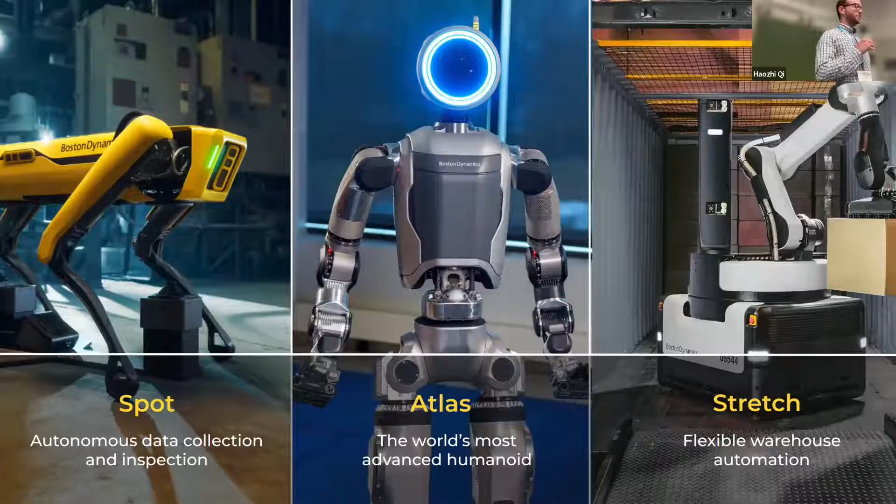It's been a very exciting time to be working on robots and growing quickly. Just to give a little overview of some of the robots we have at Boston Dynamics, our three primary robots are Spot, our quadruped robot, which many of you will be familiar with - it's an autonomous data collection and inspection robot primarily. We have Stretch, our wheeled mobile robot, primarily used for warehouse automation. And then, of course, Atlas.

This is our new electric Atlas robot, our humanoid platform that we've been using most recently for a lot of cool manipulation stuff. As I said, this is our electric robot. Most of what I'm going to talk about in this talk is going to be dealing with our previous version of Atlas, the hydraulic Atlas robot, but many of the manipulation skills will transfer over to electric Atlas.

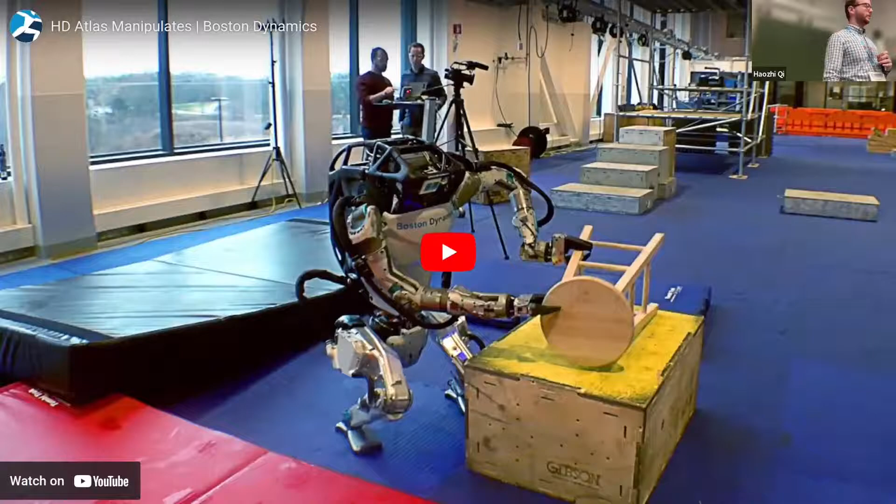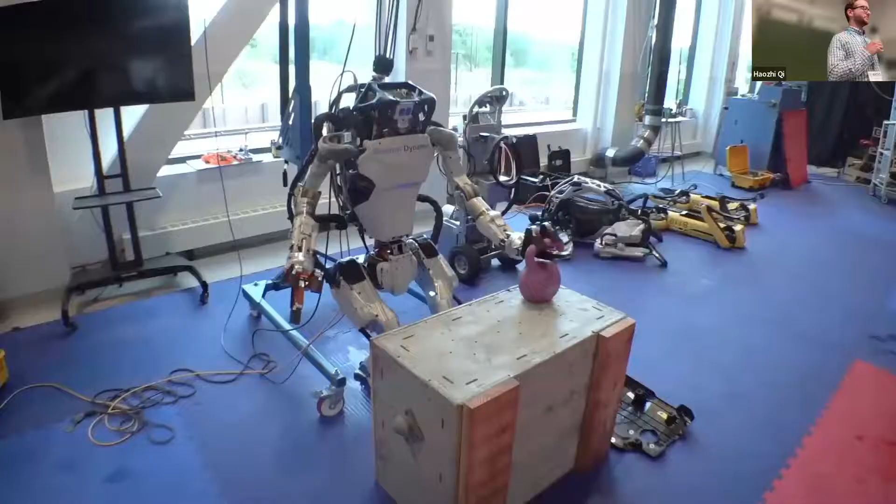I want to focus on some of the different technologies that went into this video that was recently released, called HD Atlas Manipulates. This is a montage of some of the different manipulation skills we've developed for Atlas. You can see pick and place of some of these large objects, lifting kettlebells, which we'll see a lot of, doing things like object reorientation, and more fun pick and place stuff.

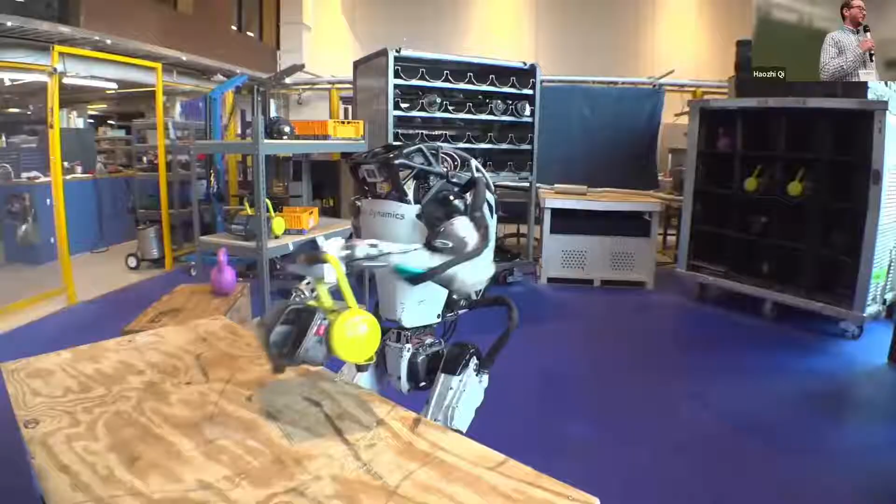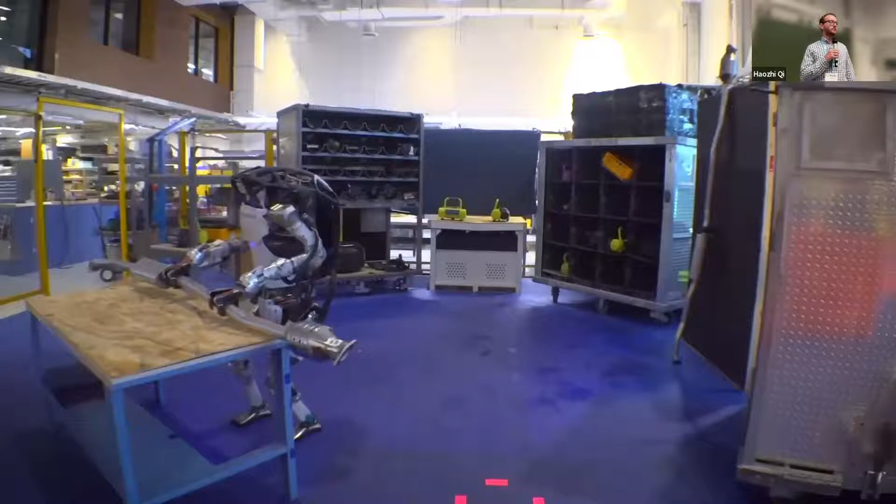This is a fun one - this is regrasping an object, which is particularly tricky. Obviously, dancing is a big part of what we do. We're particularly interested in lifting heavy and inertially relevant objects with Atlas - that's one of the key capabilities we're developing. So here we're lifting a big exhaust pipe. Here we have a heavy tool bag, and we want to retain our ability to do dynamic locomotion.

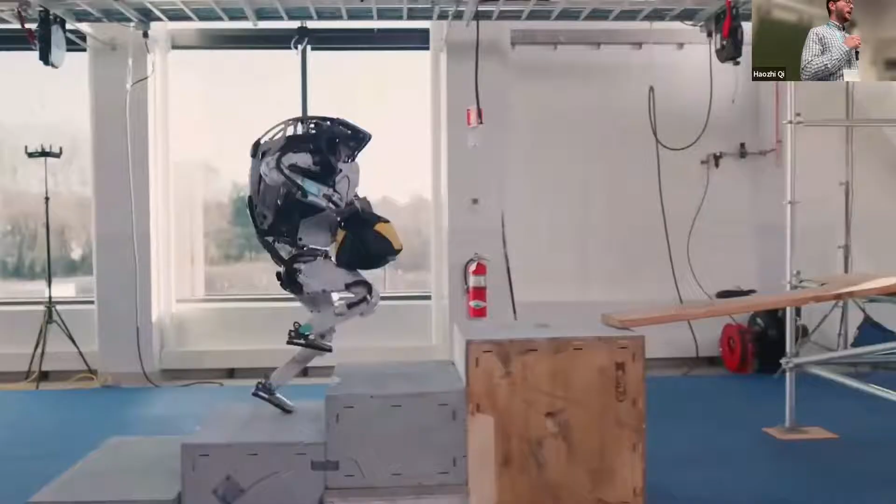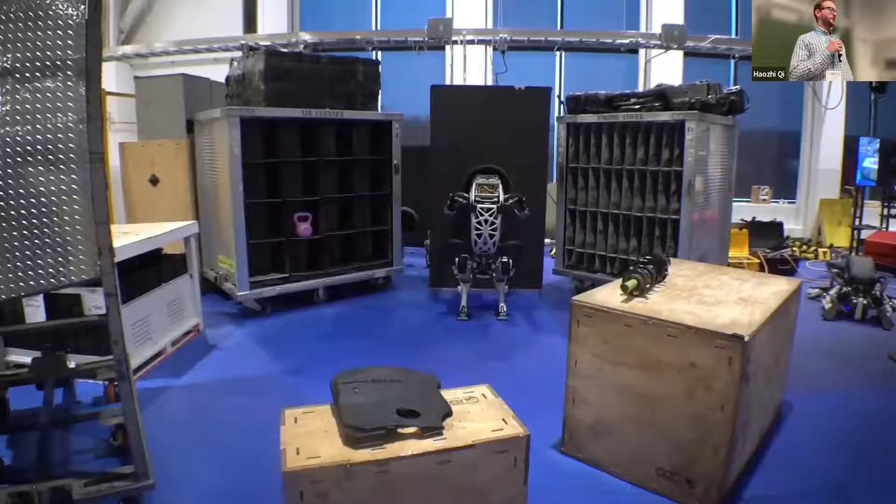Here's a bit more pick and place of some heavy car parts. This is a strut for an automotive strut, which is around 7 or 8 kilograms. This is a wheel, around 10 kilograms. The robot actually needs to reason about how heavy these objects are in order to balance as it's moving around, which makes this particularly tricky. Here's another kettlebell - Atlas is always getting a good workout.

At the same time, we also want to be able to manipulate some delicate parts. So here, this is a plastic engine cover.

I want to go into some of the technical details of what went into the behaviors in that video that are easy to not notice as they go by. In particular, we've been developing new technologies that support things like regrasping, like we saw earlier with the strut, but here it is with the compressor.

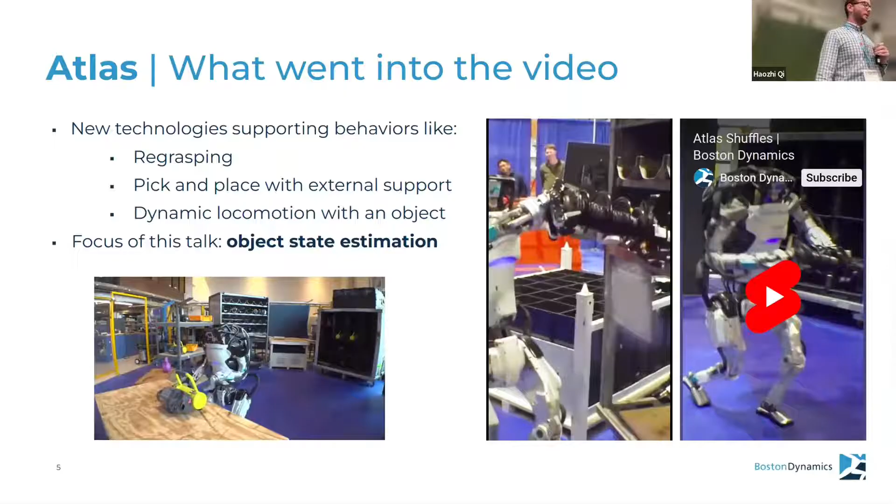Picking and placing objects with external support - this is particularly tricky, reasoning about how much of the object's weight is being supported by external fixtures rather than by the robot itself. The robot needs to know what's going on in terms of the mass properties of objects. And then, of course, doing dynamic locomotion with a heavy object requires the robot to reason about how it balances in response to this inertial load.

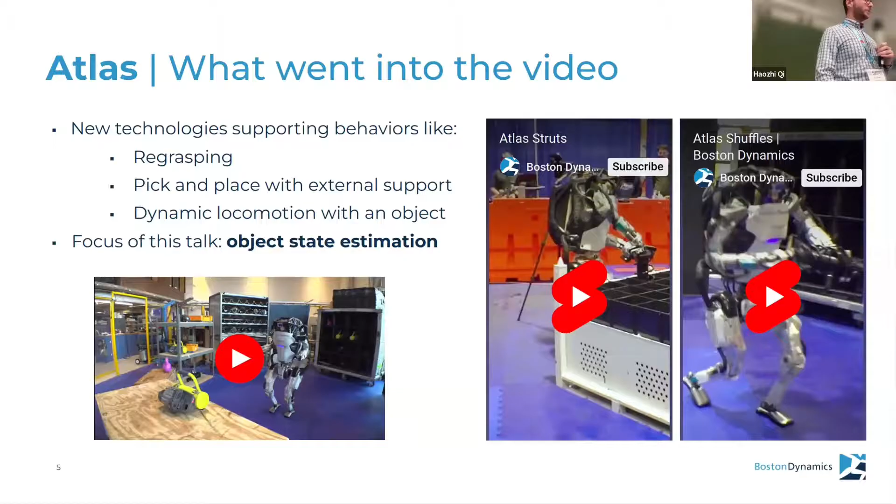Now the focus of this talk is going to be on object state estimation. But first, I want to give an overview of how Atlas works from a control standpoint. The workhorse technology that gives Atlas its athleticism is called Model Predictive Control, or MPC.

I expect many of you will be familiar with this, but for those who haven't seen MPC before, the basic idea is that Atlas is continually replanning a near future trajectory in a moving horizon. Starting from its current state, it uses online optimization of some objective function with respect to constraints relating to Atlas's dynamics and kinematics, and we track the most recent solution trajectory.

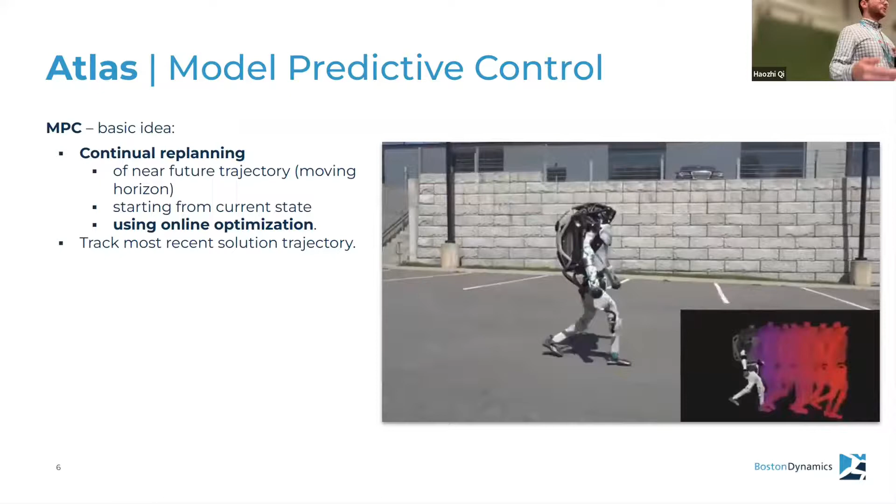So this is what that looks like. You can see Atlas is predicting a future horizon of the different kinematic states it needs to go through. But of course, this requires a model of the dynamics, and this is the blessing and curse of model predictive control. The fidelity of your model matters a lot for the performance of the overall system. Everything that goes into this involves nonlinear dynamics, costs and constraints, so you iteratively linearize and solve, but you need a good model of the system.

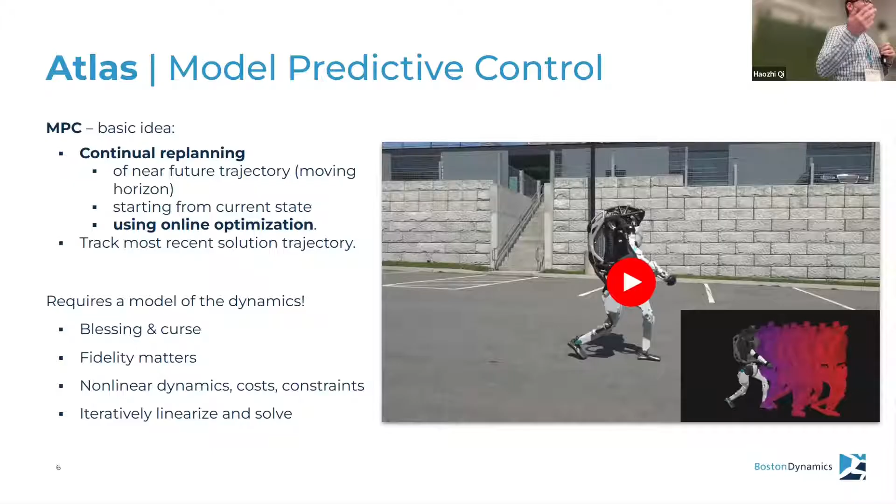Now, to make this work for manipulation, we wanted to manipulate objects that are heavy enough that their momentum actually matters while retaining dynamic locomotion ability. We don't want to just compensate for this inertial load on the object, but we actually want to be able to exploit it as we're moving around. And we want to do this in a generative way. We don't want to have canned trajectories for specific objects because we want some hope of this actually scaling.

And of course, we'd like to provide only a high-level task specification rather than having to give the robot all the details. So here, an object reference trajectory will guide what the robot should do, and the robot can figure out how to affect that change on the object based on the kinematics and dynamics of that whole system.

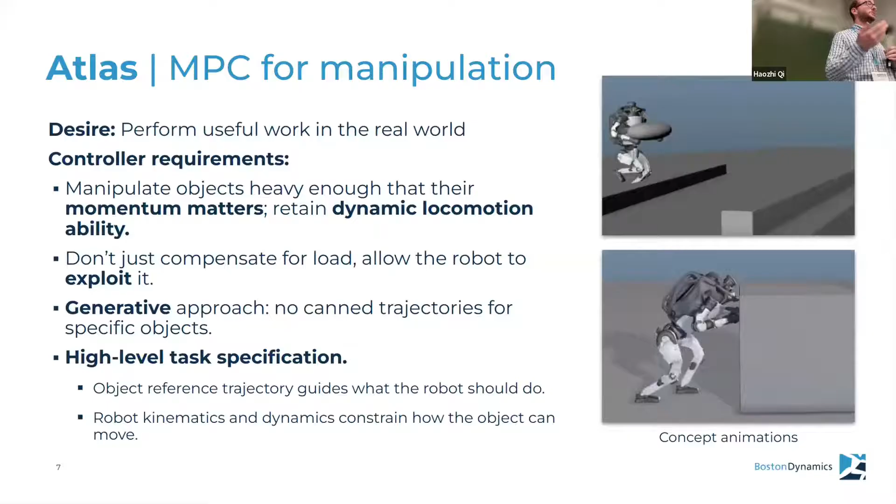So MPC with an object model has powered a lot of our developments over the last 2 years, and it's enabled us to do lots of cool stuff like dynamic locomotion, which you can see here, where we are picking up this exhaust pipe. I think this is also around 7 or 10 kilograms in that range. And we can do parkour with it, which is super cool. The same sort of pick and place that we saw earlier.

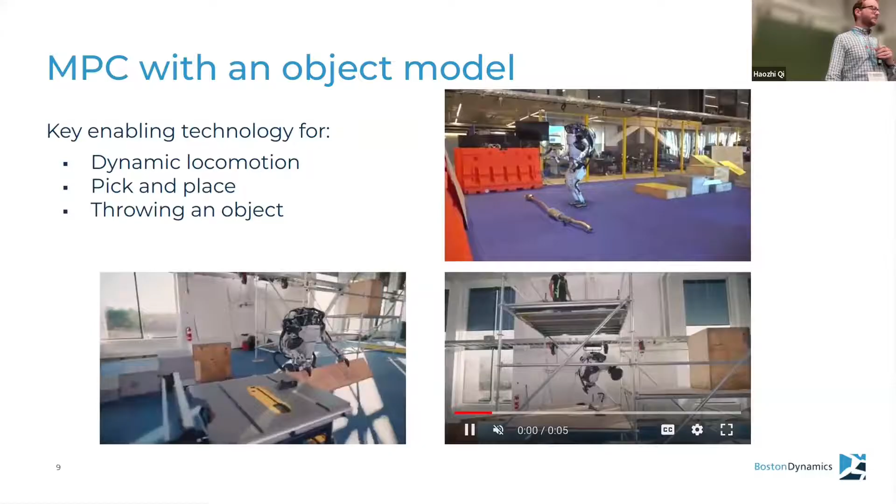And then even pretty cool behaviors, like throwing an object. Here we're throwing a heavy tool bag to a desired target location.

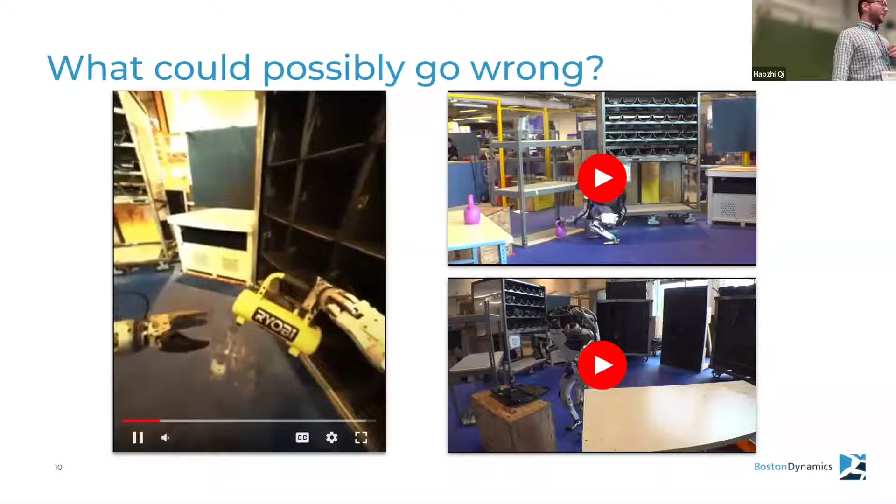But of course, in practice, when we run this around the lab, things go wrong all the time. So we see things like this, where we miss a grasp, we drop an object. We go to place a kettlebell, and we just totally miss and drop it on ourselves. And this is my personal favorite: every now and then, we'll pick up an object, go for a grasp, and the robot just totally falls over.

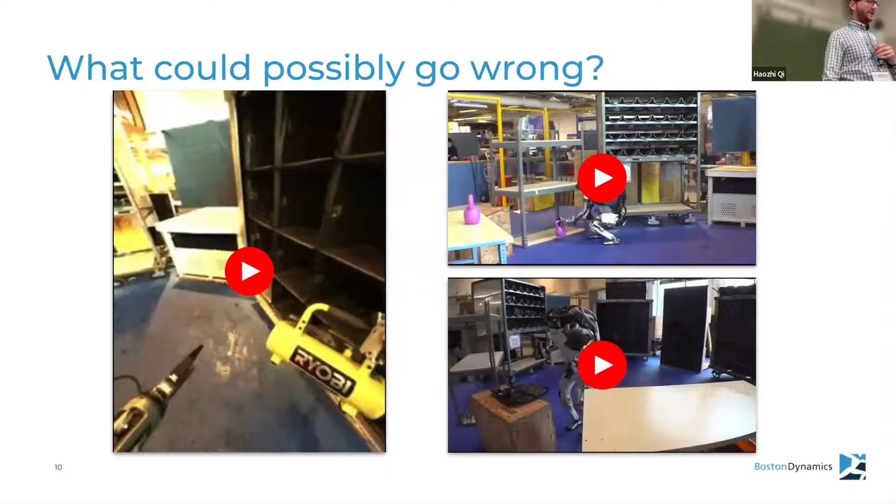Okay, so what went wrong? The key thing about this MPC with an object model idea is that we require some idea of where this object is at all points in time. We need to know the object's state in order to have some idea of its dynamics and kinematics. This is a huge drawback of that approach, because in every one of those examples I just showed, the robot thought the object was somewhere that it was not, and that caused it to miss grasps. Occasionally, because it's thinking about the momentum of the object it's about to grasp, it will miss and then just fall over. We don't want this.

What else could possibly go wrong? Here I'm showing 2 videos, simulation videos of Atlas, and I hope it will become clear why I'm using simulation in a moment. On the left, I'm showing a video where the robot's about to pick up this kettlebell. I'll give you a little primer on what's about to happen: it's been told that the mass of this kettlebell is much less than the true mass, so it's not expecting much mass of the object. Let's see if the video loads when it goes to pick it up.

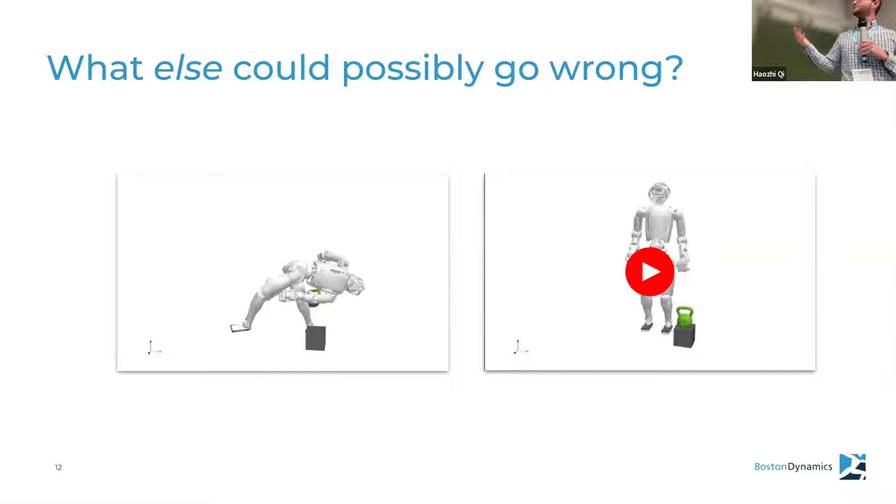Immediately it gets thrown off balance and falls over. And then here, we do the opposite. We tell the robot to expect a really heavy object, and then it doesn't have time to react to the fact that the object is actually much lighter than it expected.

This is the second drawback of this approach: if you want to know your object's dynamics, you need to know its inertial properties, how heavy that object is. For MPC to work well in these settings, we need to know the mass properties of the objects we're dealing with. In many of the examples I just showed, we did know the mass properties of the objects, so that helps a lot.

But I want to talk about how we can relax some of these assumptions, or just do better in general, and have a more robust manipulation system on Atlas.

Okay, so I want to first deal with this issue of object pose estimation. These are the ingredients that we have on Atlas. We have two primary sources of information. The first is forward kinematics.

The essential idea here is that if we assume the object is in a fixed pose relative to the end effector, then we can use the robot's forward kinematics to say the object is stapled to my end effector — however my end effector moves, that's how the object moves. This is a high rate signal, which is great. You don't need to be looking at the object to know where it is, which is also great because oftentimes we're carrying objects that are only in partial view, occluded, or out of frame entirely. But the downside is that we have no way of knowing when or how an object has moved relative to the end effector.

This is a problem for two reasons. One is that when we're not trying to affect motion of the object in hand, it often happens accidentally. The second is we have no way of actually commanding the robot to move an object in hand if we wanted to, which is particularly challenging.

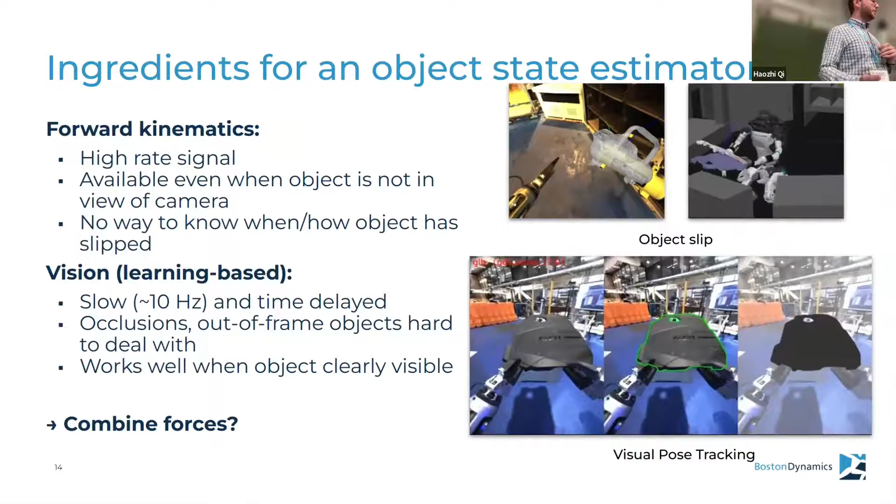The essential idea here is that we'd like to combine these different sensing modalities — this learning-based model of object poses, and this more traditional model of forward kinematics — to do better. This is our recipe here.

The idea is that we're going to use forward kinematics, but allow the object's pose relative to the end effector to change over time. So we'll seed the object pose estimator with our current tracked pose estimate, and then propagate its vision updates to the end effector frame. Then MPC will assume that the object is glued to the end effector at the latest end-effector-relative pose and use that to plan forward in time. We're just continuously updating that state.

We also require that this happens in real time. So how do we actually do that? At the same time, we need to deal with the fact that these sources of data are coming in asynchronously. The way that we handle that is with something called a factor graph. These are a particularly natural modeling tool for these types of problems. There are many convenient open source tools for working with problems parameterized by factor graphs, like GTSAM and G2O.

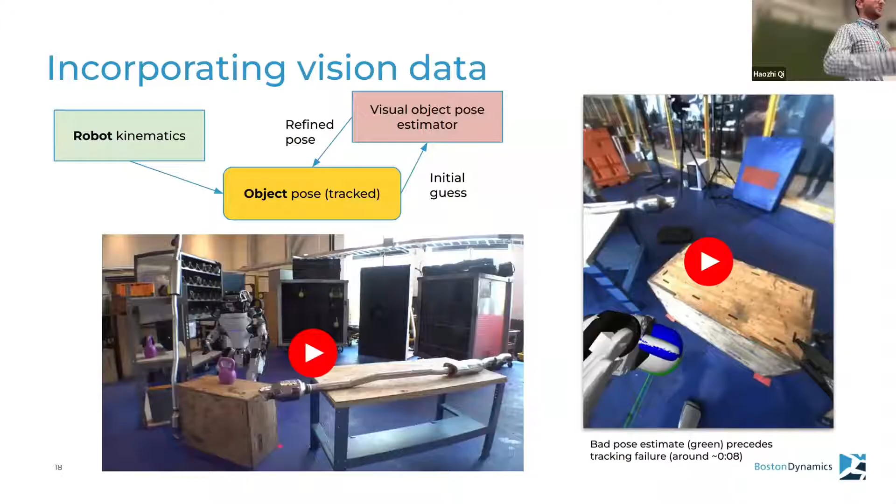So what went wrong? You can see what happens on the right here. In green, we get a bad pose estimate. This causes the object to go out of hand in its track. Since we're operating in a regime where we send the tracked pose back to the object pose estimator as an initial guess, the estimator can't refine that pose anymore, and the whole system goes unstable when we drop the object. So robustness is really important here, otherwise we're just going to be dropping objects all the time.

Fortunately, when the system works, it works quite well. Here you can see the kinematic track in red compared to the fused track in blue, and the blue tracked object is much better than from kinematics alone. But we need to know, in order for this to work well, when the neural network got the right answer without actually knowing the answer, because of course if we just knew where the object was, we'd be done.

A natural thing to try here, and a thing that we did try, is to essentially just ask the neural network to score itself. But of course this is environment dependent, lighting dependent, background dependent, and often this works about as well as just the pose estimation in the first place.

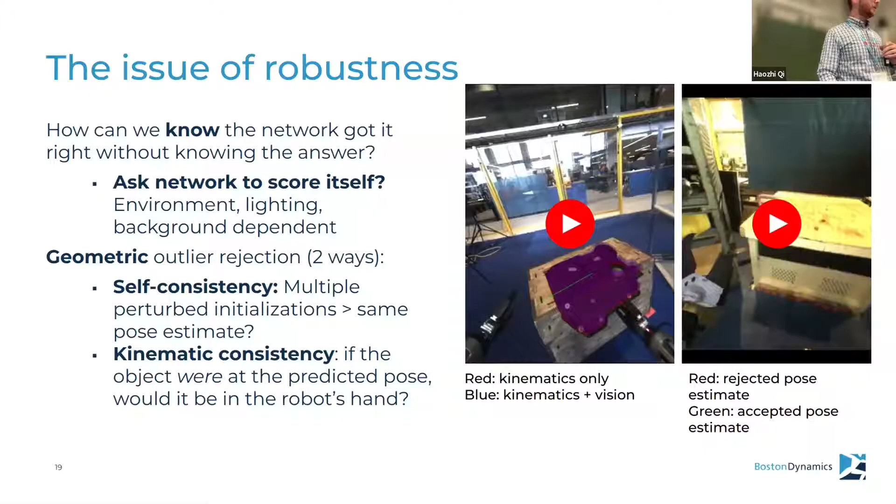So what we use instead is this geometric self-consistency measure, which is common in pose estimation literature. Essentially, we seed the neural network with multiple initial poses, and it gives us back multiple answers. We evaluate the consistency of those poses on the way out, and if they're consistent, we say it's more likely to be an inlier.

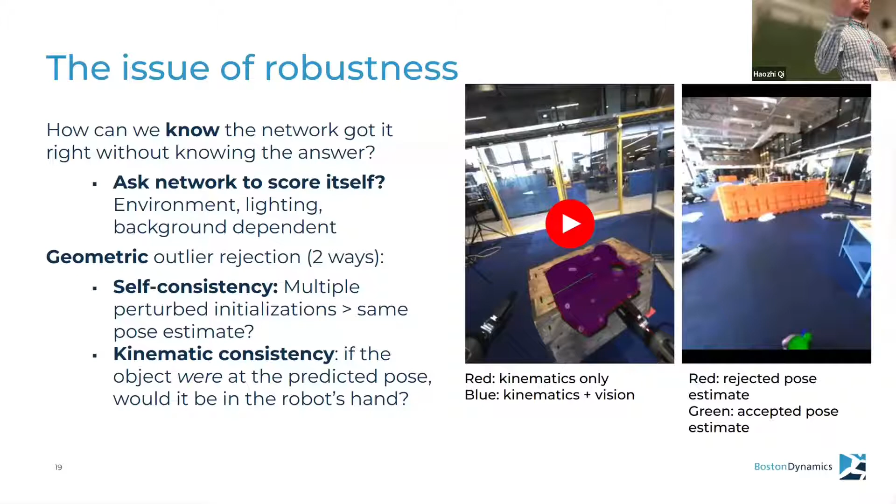Still, these measurements could be biased. So we also check whether or not the predicted pose could correspond to the object being in hand, or if it's out of hand, then we reject that measurement.

Okay, I want to talk briefly about how we add in mass property estimation. So here, we just kind of mirror what MPC does, where we augment our model with this: net wrench is approximately equal to the momentum rate of change.

Here, rather than in MPC, where we're trying to compute the desired wrenches to affect a momentum rate of change, we're measuring wrenches and trying to determine from the momentum rate of change what the mass properties of the object are. So we add these new states, the mass and center of mass, and we get object velocities and accelerations estimated from forward kinematics.

And then we measure wrenches from the wrist force torque sensors and joint torques. And then we say that the object frame mass properties should be approximately constant over time.

The nice thing about the factor graph representation is that it allows us to develop an estimator that is very modular. We can essentially staple on this mass property estimation module to the kinematic state module we had before, and use exactly the same inference approach.

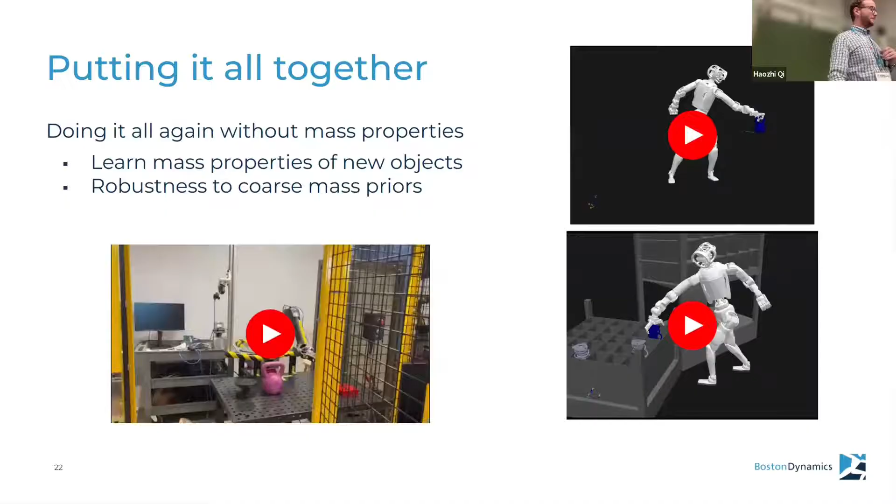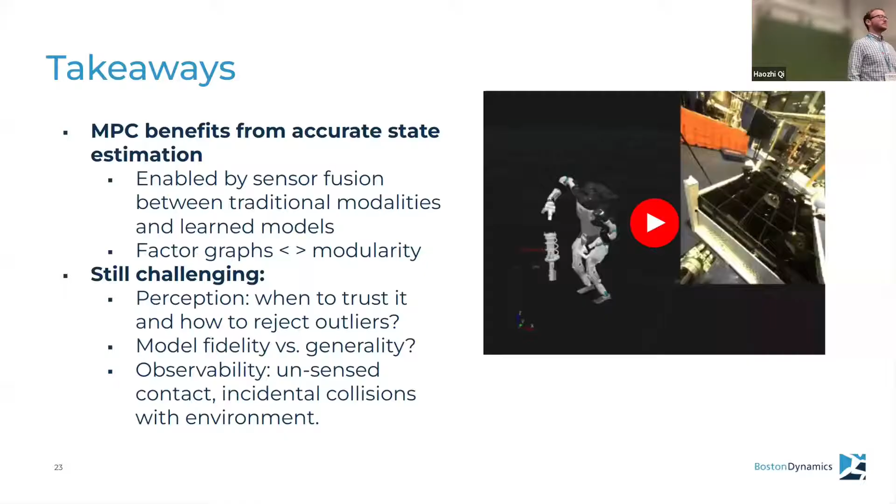Yeah, those are a lot of good questions. For the first question, yes, we assume that we have a model of the object. The visual pose estimator uses a render and compare method - we render the CAD model and use a neural network to predict how we should move the CAD model to align with the image. We also used that to derive inertial properties of objects, assuming constant density, things like that.

The second question was about using position control. We've been thinking a lot about position control recently, and we have some results about doing that. I don't have anything in my slides, but yes, that is a thing that we do also, and it works pretty well. But that's relatively recent - we started doing that within the past year.

Is the problem of the existing approach maintaining balance? Yes. So one of the things we've been doing more recently is using impedance to pick up an object, and then from there, if you look at the object, you can initialize where that object is in hand, and then start doing tracking if you want something fancier. But this is totally compatible with doing those kinds of control methods.